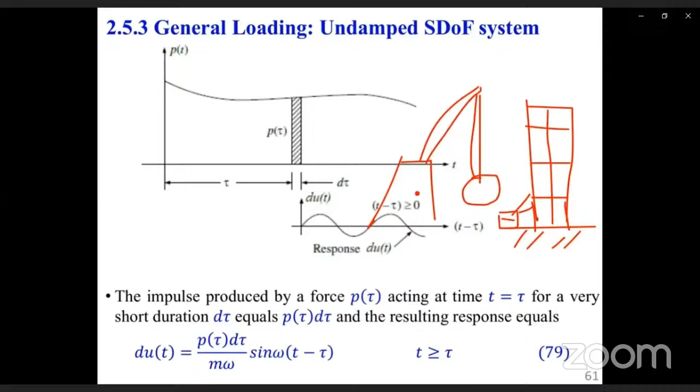So this structure can collapse on him. You find like for example, if you observe the Chinese, when they are constructing, they're demolishing some structures, they have some machine positioned at a distance, and they have got a very high crane, and then we have like some suspended weight which can swing to hit this building. So this allows the structure or the machine to be positioned at a distance, and then this can swing to and fro, and it hits this building up to collapse.

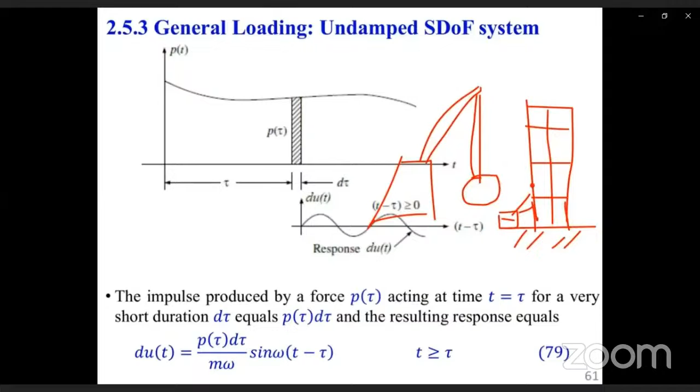So what we are saying is that at the initiation, when the first impact to this building will be this, the swinging part, the weight have to be displaced at a distance. Then it comes and hit this wall. So there is the free motion that initiates, then comes, then because of this weight, it hits the structure.

This structure is set into dynamic motion. So the response of this structure will be a combination of the free vibration because of the initial condition, initial displacement, plus the forced vibration due to the impact of this weight on the structure. This is the part we are saying here.

So now this is why we are saying if the initial conditions are that we have displacement and velocity not equals to 0, then we have to add the free vibration response. This is from equation 16 in your notes, and this is the green part.

This is the solution to free vibration of motion, and now this is a solution due to forced vibration with arbitrary loading. This is the Duhamel's integral here part. Now, this is the part I wanted to mention about the arbitrary loading.

In case the p tau or the arbitrary load is empirical, that is not analytical. So if it was analytical, for example, if the loading function, analytical meaning we have an analytical expression. If this loading function was like constant, a straight line, because now you'll be knowing that P is equals to, let's say like P naught, if this is P naught here, okay? Or if it was something like that, we can be able to express.

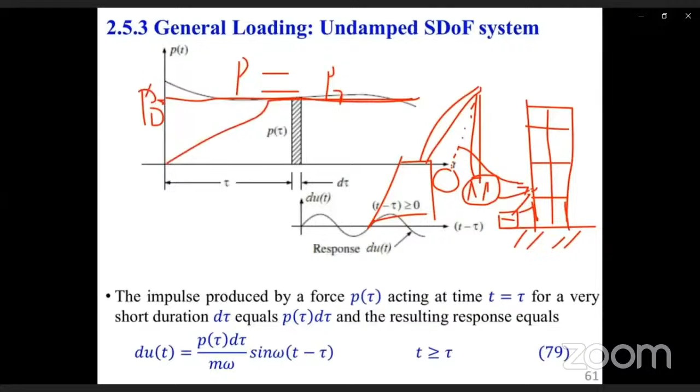If you look at your note, I gave an example of an analytical equation. But so if it's not analytical, then it means that this integral can only be evaluated numerically.

So we'll be coming to cases whereby we need to use approximation method of solution of numerical equations like Simpson's rules, trapezoidal rules, or simple summation, etc. So that's why we are saying if this is not analytical, then Duhamel integral has to be evaluated numerically.

Now let's simplify this expression so that we can be able now to analyze that, because that is now what we are just doing in our section here, or in our analysis here about arbitrary loading. Arbitrary loading, we assume them that they are empirical for our case.

So you trace this trigonometric identity. This one, of course, we use it to expand and also to factor or to simplify our expression. So if this is the case, and then you assume the case when U naught and V naught is 0, so that we can ignore this part of free vibration. We had already analyzed this part before, so we can ignore. We just want to be left with the Duhamel's integral with no free vibration.

Therefore, this equation 80 can be expanded. This part here can be expanded using this trigonometric identity, so that we have sine and cos. So we have this part, and again, expanding it in this form, we can now simplify it further to this form here. You see, it's a very simple form now.

Here becomes equation 82, where A, the whole of this part, we can call it A, and in the notes that I have given you is A bar, and this part here, the integral, is B, such that now our equation simplified, the Duhamel's integral becomes very simple, and it looks similar to the equation that you have been handling, where A is this part and B is that.

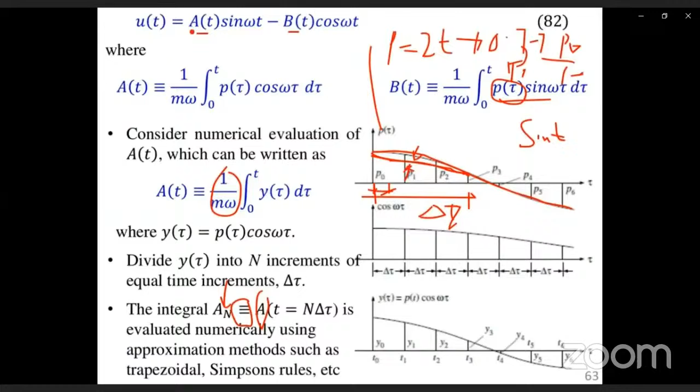And what can we measure in response? One of them is the displacement. Once we apply that load on a structure, like in our building or a portal frame, we will want to know what is the maximum displacement, or what is the displacement at this time, or what is the force experienced in that structure at this time. That is what we call the response.

So you might find we are talking of the response in terms of force on the structure, but we are also using a forcing function, that is, there is a forcing function applying a force on a structure. So you want to see what is the internal force experienced in that structure.

In our case here, I found it necessary for ease of understanding to focus on response in terms of displacement. What is the maximum displacement, or the minimum displacement, or what is the displacement? Of course, we are not interested in minimum. Maximum is the worst case scenario.

So that we know in our design, is the maximum displacement induced by that external applied force sustainable by our structure? Because we know the material characteristics, if it's a concrete structure, a concrete column, will then be able to take in that displacement. Is it allowable in our design, or will the structure fail?

If not, what can we do? So if you're analyzing, because this dynamic analysis mostly involves dynamic loads, for example seismic analysis, wind loading, impact loading, that's why now you start thinking of alternative materials or structural systems, whereby you may think of using concrete filled steel tubes for our column, because we know steel is more ductile compared to concrete, and concrete cannot take as much deformation as a ductile structure. So that's why we are doing this kind of analysis.

We may also want to know at this time, t is equal to maybe 5 seconds, what will be the displacement? Will the displacement be within our allowable limits? That is the response we are analyzing.

We say now BT, again, you can express it in discrete form, Bn, just the same way you express An. And in this case now, y tau, or the function y tau, the integral part will be equal to sine. Of course this part, A is T, surely here you need correction. In your notes, the one I gave you on page 88, we have the first part. So if this, of course, this is our A. This is cos, then this should be cos.

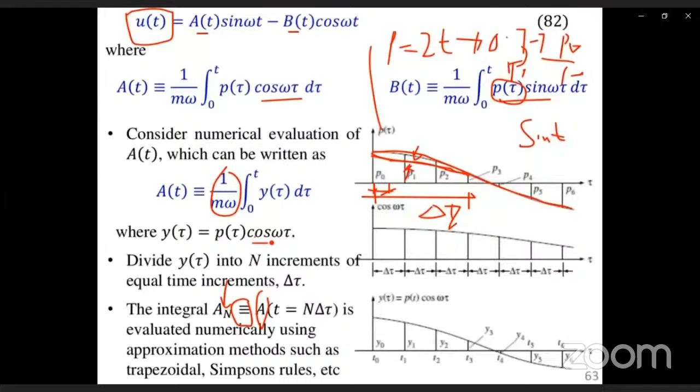Let's go back, let's just go back slightly. We see that A, oh yeah, it's correct, the notes are okay. So because A is this part, I was looking at this sinusoidal part. So of course the B now is the one that we are calling y tau. This is the integral that we are evaluating.

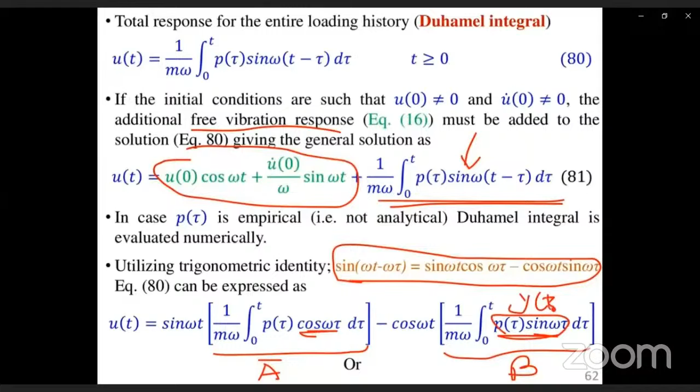So in our analysis now, we are saying B can also be evaluated in a similar manner. So we need to express B, the continuous BT, in discrete form Bn, and then we set Y will be that. Finally, the total response of the overall system will be U.

So we are saying UT, the continuous UT response from equation 82, can be approximated as UN. You remember UN, this N represents the number of divisions, as given. So this is the discrete form of equation 82. Equation 82 is continuous, 85 is in discrete form.

We have evaluated this integral An, Bn, and now the time T. T was continuous throughout, now we want time at discrete points. So at time T1, T2, we apply like that. But now this is the total response. We can be able to know what will be the displacement at a certain time, what will be the maximum displacement, and what is the displacement for the overall.

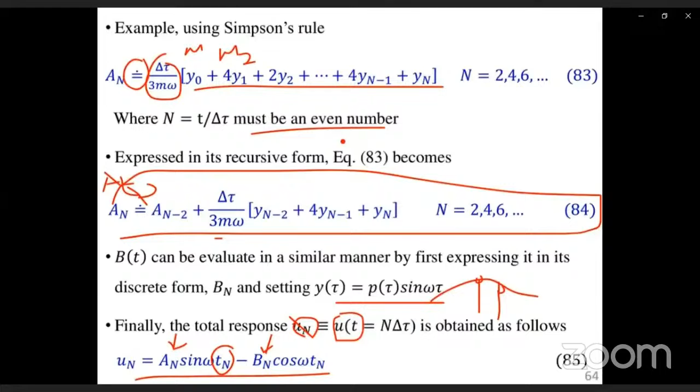After we do that analysis, we have the displacement at different points. We can know for our structure, at different points in time, we can plot the variation of the displacement in terms of a curve. Our response can now be expressed in terms of displacement U and time T at different time intervals. So initially, analytically, we could have a smooth curve, but now the response will be in discrete form, so you might not see it. If your time interval is small enough, the sharp discrete form may not be seen. If the interval is small enough, it will be almost as if it's a continuous curve.

Now, something to mention is that the approach you are using can only be applied to linear systems. Consider a steel column, a linear system. If we have a rigid frame like that, carrying a platform, then we have an impact loading there.

It could be a bomb blast, acting over a short time. So our structure will deform, and then it shall have a to and fro motion. So having a to and fro motion, which will continue dying down due to damping. What we are saying is we are restricting our motion.

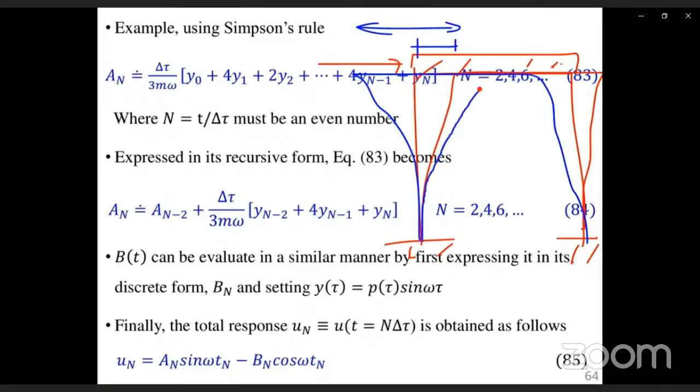This displacement is for the elastic range. This response, because the impulse acts over a very short time, we are adding those small impacts of time. So we are saying we are adding individual responses. Our structure, we are not considering the region where there could be permanent deformation of our steel structure. So we are assuming our steel column acts within the elastic range, that is, it can be able to come back to the original position. There will be no permanent damage.

I hope that becomes a bit clearer as we go forward, because later on in future studies, you'll be talking of nonlinear analysis. Most of the studies, in almost all of the theory of structures work you have done, you have been dwelling on the elastic, linear system.

Because by the time most design that you are doing, strength design, ultimate limit state, so we design maybe for serviceability limit state, we want the structure, even if there is vibration or deflection, to go back to its original position. We don't want our steel beams to sag and remain sagging. But we know for studies like earthquake design, we may allow for that. For dynamic design, what we do not want to occur is total collapse. But we want to see the ductility, how much maximum load can be sustained before a structure collapses, because we are talking of safety to people, the occupants.

So in that case, the analysis is just talking of small impulses due to time intervals, summation of different small time intervals. So the application of this equation is only limited to linear systems. Let's see how we can apply these steps to analyze the response due to an arbitrary applied dynamic load in an actual example.

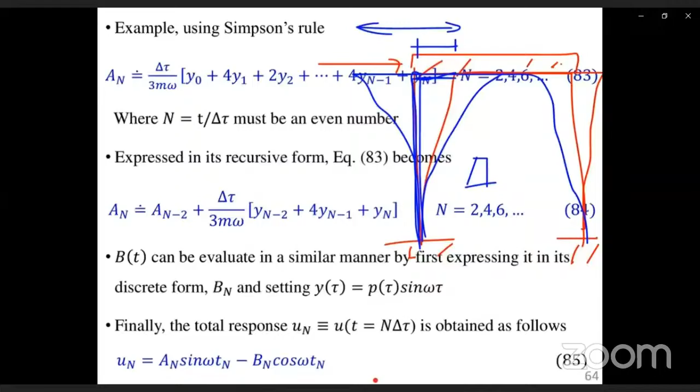All right, so this example, we want to go through it very quickly. Another thing I wanted to mention is that right now you are seeing...

This is an imperial unit. When you see kilopounds and feet, of course this is mostly from an American book, those nations which follow the imperial or American system. For us Kenyans, we are in the British system, so we use metric units. But that does not mean anything, we can go ahead and do the solution. Let's look at this example.

I know as we continue, you'll be able to comprehend much. We want to solve this. There is just a small...

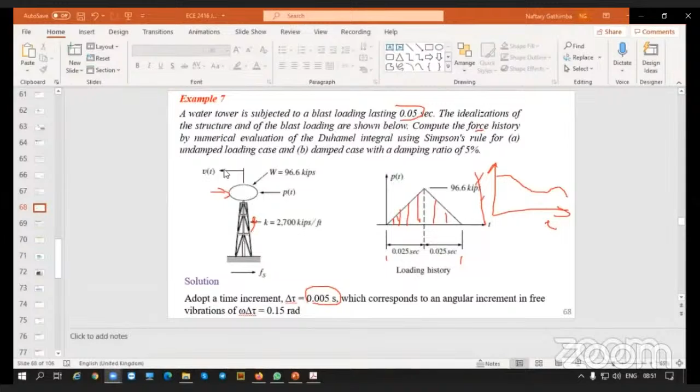We are going to forget about the second part, but you can look at it later on. This is just the normal procedure we follow when working out Simpson's rule. For that case, we are looking at how we evaluated AN. We are going to obtain what is AN, what is BN.

Using BN, remember BN is an approximation of BT, the continuous function BT. Remember BN and BT, these are condensed format, of course. These are the Duhamel's, I've found another book saying another pronunciation, Duhamel's integral. However you choose to pronounce that is not a big issue.

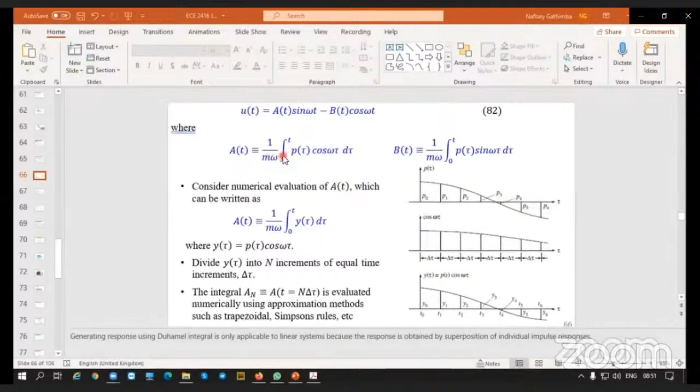So this is the part we are focused on, because the p-tau, this is what he's saying, this is now numerical, it's not analytical. So what you need to do, you see this breakdown, you already know what is A and what is B, what is AN, what is B. So you need to evaluate all this.

These are constants, the delta tau over 3m omega. You need to go to what is the ordinate Y naught, Y1, and all that, and then we do the summation, and then we can use equation 85 to get what is the response in terms of the displacement. If it's force, of course, remember F is equal to K, because we are within the linear range.

We have talked of this Duhamel's integral being applicable in the linear range. So of course we know Hooke's law applies in that range. So for the force, once you get the displacement, we know force is equal to K times displacement. So you just need to multiply U with K, the stiffness, to be able to get the force, right? So it's as easy as it can be.

And allow me now to just show you this. So you need a number of things.

Because what you need to see or understand, let me project this using my bigger slide that I have shared. Yeah, this is what I have shared with you.

The first thing we have here, n is the number of intervals, and they have to be even for Simpson's rule to apply, for trapezoidal rule, odd, and so on. All that we are doing here, which I don't think is necessary to go through completely, is just obtaining the different components of our equation.

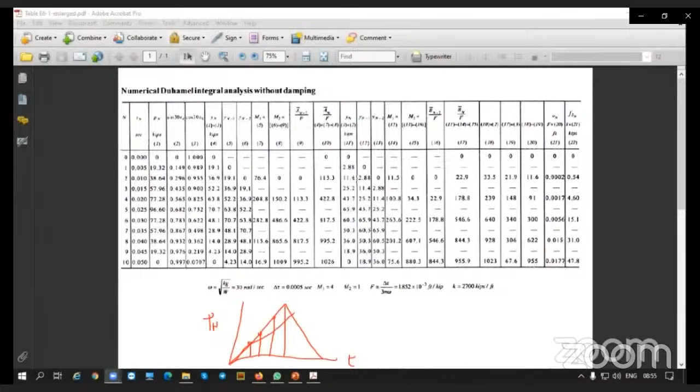Okay, so we are saying, oh, I was trying to go back. You can't go back, it's just one page. So you're saying...

Remember, this is the equation that we are using. These equations have to be at the back of your mind. I wanted you to see this. This is PT, continuous, Pn when it's discrete. And now we are saying when you subdivide at t equals 0, p equals 0.

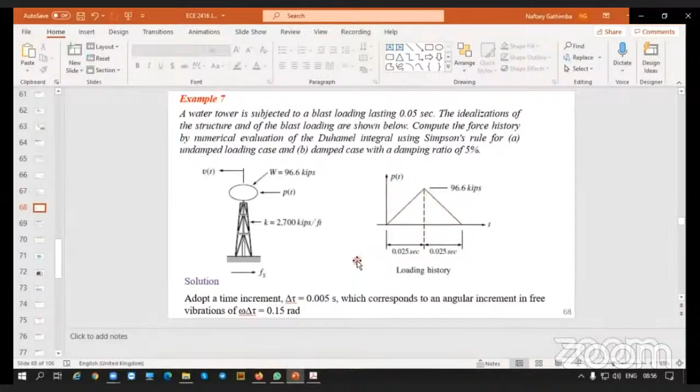At our division, p when n is 1, where t equals 0.005, you just need to use similar triangles. Once you subdivide this, you can use similar triangles, or even the equation of a straight line, to obtain what is p at the different time intervals. That's what we are feeding into this column, Pn.

So what happens with the Duhamel integral analysis is that you're going to have a lot of working out there, but it's as simple as you can see tabulated in this one. So then you need to move.

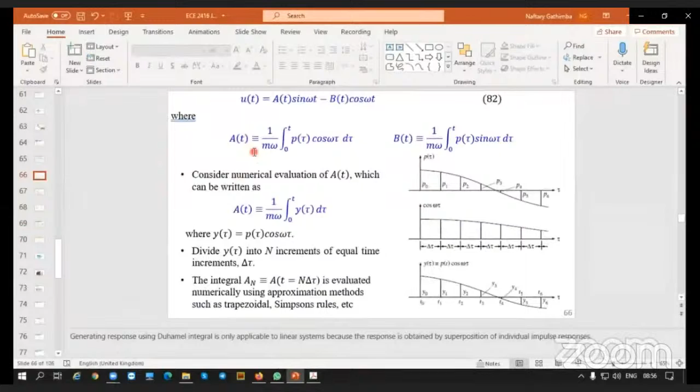This is a part for an. So we know for an, here, for an, you see an, we have sine omega Tn. For Bn, we have cos omega Tn.

So the other thing we need is sine omega T, Tn, n varies. So for all that, we have a column for sine omega Tn, because we already have a column for Tn. And also we have a column for cos omega Tn. Then we evaluate what is An and Bn.

So to evaluate An, we need a column for delta tau over 3m omega. You need a column for that, and then for all this. So this is what's happening in this column. I'm saying this chart is not clear, that's why I've given this.

So again, you need to get what is yn, that is yn, all the way from 0 to 10, then yn minus 1, yn minus 2. So m, these are the weighting factors.

Remember the weighting? Yeah, m is 1 and 4 for Simpson's rule. So the weighting is this. You see these values, for the first ordinate, the weighting factor is 1, the second is 4. So you see 4, 2, 4, 2, 4, 2, and the last one is 1.

So that's what we are calling M1 and M2, M1 is this here. So M1 times that, M2 times. You see the column, the first and the last will be multiplied by 1, and then the second one, M2. That's why you're seeing at the bottom here, M1 is 4, M2 equals 1. 1 is at the end here.

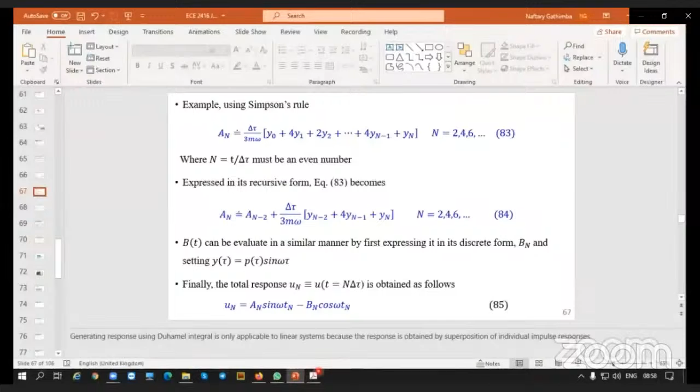But in essence, you can take a number of terms and put them together and evaluate them simultaneously. What you need to understand is that you're expressing this equation, and if you want to simplify, you can say all these parts equal W. Then you know what this W is that you've condensed in this column. You do the same for AN and BN, and then there's a column for summation. So it's simple.

You see, by just looking at this, the workings involve a lot of punching the calculators and all that. This is better if you can do it in Excel. It's good to do this in Excel so that you can employ the computation power, the formulas. You just need to input the formula for addition. When you finish inputting the data in these basic columns, the other ones are automatic.

Okay, and with that you have seen the response, that as time varies from TN0 all the way to 0.050, you see how the displacement is varying. So these are the response, the displacement, and these are the force.

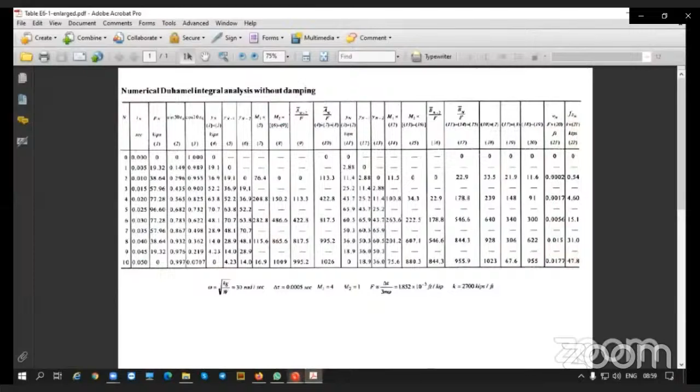And with that, you can move ahead and look at the plot. When there is no damping, you can see how it varies. Now this is just a plot of the same.

So you're just plotting Tn, this second column, and Fsn, the last column. So it's the Fsn plot versus Tn.

Remember, you might be told to plot the response, maybe the displacement, but here we are plotting the force because you have already gone a step ahead to obtain the displacement, and then we get the stiffness. That's why this part was important: obtaining what the K was for different times for this structure. It was given in our equation.

This kind of problem is best tackled when you sit down and work it out in an Excel sheet, and that's why I've provided the solution for when there is no damping. But the second part of our problem was when there was a damping ratio of 5%, and for this one I've shown the solution. So you've seen what the curve might look like, but the workings are not provided.

This one will be kind of an exercise so you can go and practice it out. Remember, this is for your practice. It's not like you don't have the solution—where I obtained this example from, I believe it should be one of our references. If it's not in one of our references, let me know, and I can trace it from my books and tell you which reference it is. You can also go to that book and see the workings.

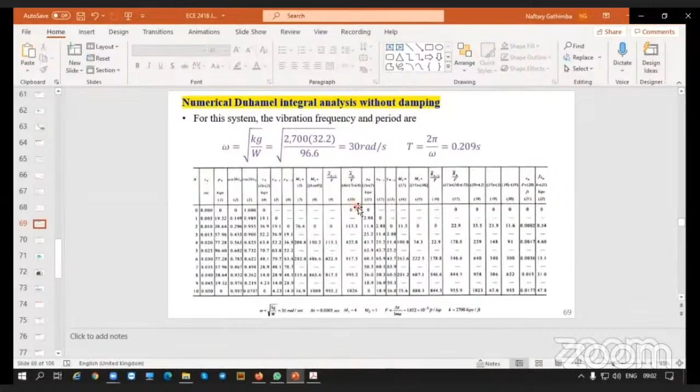But as I'm saying, even when working this one out, you don't have to do it exactly this way—you can simplify your work and have a more compact tabulation. So in terms of the derivation for this lecture and also for this course, it might be tedious, but when you come to the application, it's very, very simple.